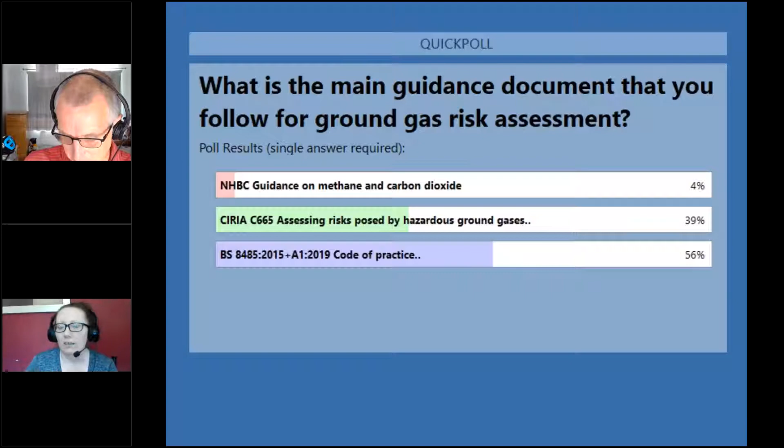So we've got 4% for the NHBC guidance, and then we've got 39% for the CIRIA, and 56% with the British Standard. So that's good. Right, excellent. No, that's good. So the reason for that question really is because what I want to do is explain one of the key differences between the CIRIA guidance and the British Standard, which I'll come to in a moment.

Can you see my screen, Alison?

Not yet, not yet. Right, okay. It says it's showing it. Hold on a minute, just double check. Right, wait a minute. Oh, that's you now. Yeah, you can see that.

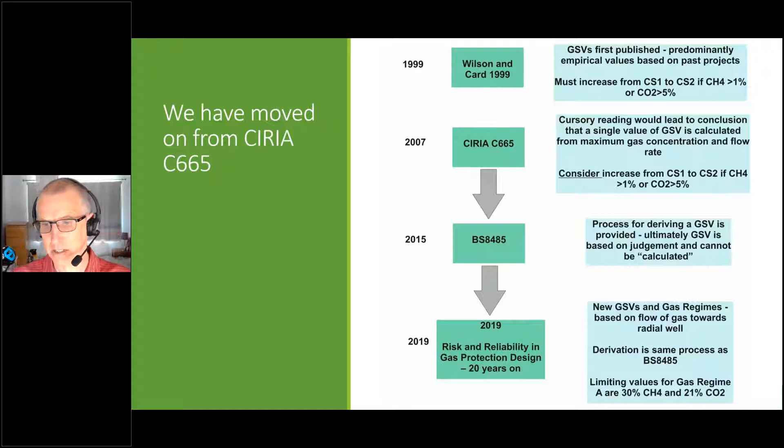And then one of the other key factors is that the limiting values for gas regime A, which is the regime when you don't need any gas protection, are 30% methane and 21% carbon dioxide. And I'll explain why that is the case in a few slides' time.

So whenever I do a presentation, everybody knows that I get on the old soapbox and talk about CSMs. Please, please, please, when you are doing gas risk assessments, whichever method you are using, do not take the maximum concentration and maximum flow rate and multiply them together to get a GSV without any thought of the CSM, or equally as important, without any check on data quality. So this is my colleagues and myself on a regular basis when we are asked to review gas risk assessment reports. And the number one is, why have they used data from flooded wells that is completely unrepresentative of what the CSM is telling you?

And equally, the other one we see an awful lot is people stick 20-metre deep ground monitoring wells into rock, into flooded sand layers in glacial till, all sorts of things, and then use the ridiculously high flow rates that they get from those wells to calculate a GSV. So please don't do that. And this is an extreme example. Well, unfortunately, it probably isn't an extreme example. We see equally bad practice on a regular basis.

So you can see here why somebody stuck a monitoring well in the top of a stockpile that was clearly going to be removed from site when it was developed is beyond me. Why they then monitored it and used the data to classify the whole site is also beyond me. But that is what has happened. They classified it as CS2 on the basis of that data, when all the other monitoring wells on that site that were actually in the glacial till, which covered the site that was going to be developed, were telling you it was CS1, and the conceptual model was telling you it was going to be CS1. An extreme example, and they were costing their client a lot of money on that job.

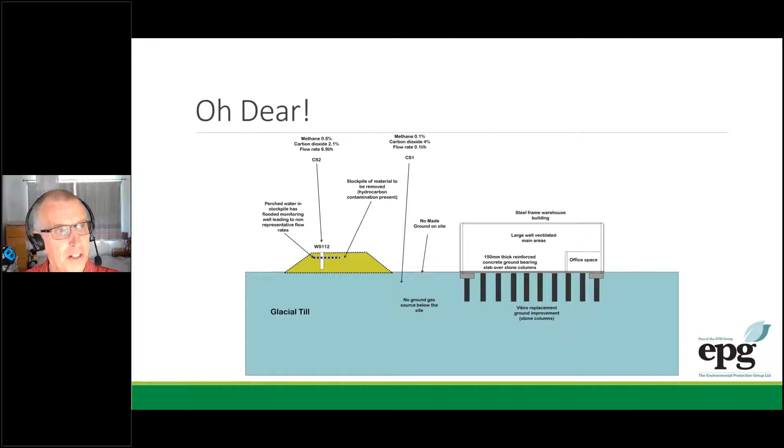But unfortunately, the people who can do that can also do things like this that is unsafe. They don't actually recognise when there is a real gas risk. So on this one, there's shallow coal workings underneath the site. The monitoring wells are in the shallow made ground, and that tells you that it's got a low flow rate. But there are indicators there, particularly the low oxygen concentration, that there might be an issue with mine gas emissions. Low oxygen concentration on its own is not a good indicator of risk, but when you look at the CSM, it does give you a warning sign.

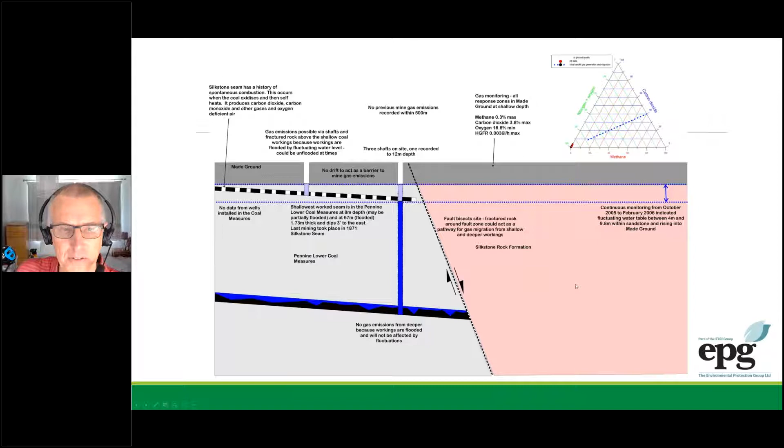And then when you look at the CSM, you can see that there are unflooded shallow mine workings. There's fluctuating groundwater over the depth where those workings are present. There are numerous shafts on site, and regardless of what the gas monitoring data in that shallow made ground says, you should be looking at what is happening in that deeper stratum, and whether the made ground is actually going to provide a buffer, for example. It needs a much more rigorous assessment. And to be honest, it's unlikely that you're going to classify that site as CS1 based on what you can see there. So these things about not looking at CSMs work both ways. The majority of times it does cost clients hundreds of thousands of pounds, but equally it can result in unsafe assessments as well.

So the process in BS 8485 is explained in clause 3.4 of BS 8485. The definition of a GSV is provided in 3.4. So it's the flow rate of hazardous gas representative of a site or zone derived from assessment of borehole concentrations and flow measurements, taking account of all other influencing factors in accordance with the CSM.

And it says there, note this definition is different from the definition of a GSV in CIRIA C665. And you can see there that's the statement about ultimately derived using professional judgment. So how do we go about doing that?

Well, the first thing to do is to collect the desk study information. That shouldn't just be commercial databases. You should actually be doing a wider search. The first thing we ever do is actually Google the site name and site address and various things like that to see if anything comes up from local history sites, for example, on the internet.

Then prepare a preliminary conceptual site model, and that should include site-specific cross-sections showing the ground profile and potential sources, migration pathways, etc. And then you do the preliminary risk assessment. And what you've got to do there, I'm forever using this word, credible and realistic sources of ground gas, because people come out with the weirdest and most wonderful statements about what can cause gas migration onto sites or sources of gas on sites. And I'll explain a few of those in a couple of slides' time.

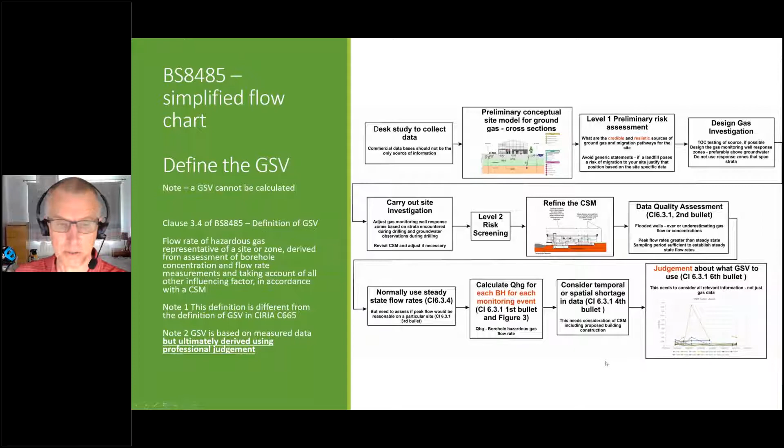There are then other considerations in BS 8485, so you need to read the whole of the thing, not just the tables. So you need to look at gas concentrations, as we've said, worst case assessment, and is it credible and reasonable. So there is the requirement to consider the increase. It's not mandatory. We read so many times people saying you've got to increase from CS1 to CS2 because there's 6% carbon dioxide. That is not correct. It says consider, and you've got to justify whether you do need to increase it.

And again, as I said, if you're on a site where all you've got is terrace gravels, there's no made ground or limited made ground, no real source, then just because you've got 7 or 8% carbon dioxide, even 16, 17% carbon dioxide, that happens because of natural processes in the ground. We understand that far better now. And you shouldn't really be increasing to CS2 on that basis.

Ternary plots are a good way of understanding what the source is. And there's a paper that we published. It is peer reviewed; anything we put in the public domain, we get peer reviewed by people in the industry. But it's not in an official journal. It's part of the update we're doing for the ground gas handbook. So that's on our website as a ground gas information sheet.

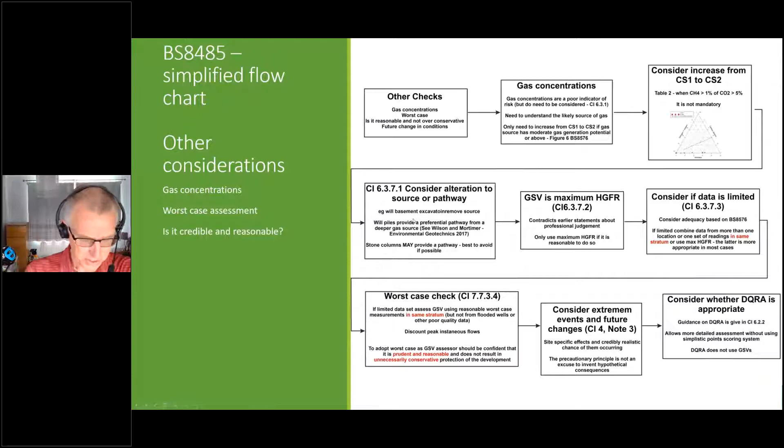But that is useful. You then consider alterations to the pathway or to the source as part of the construction. So, for example, is basement construction going to remove the source? Are piles going to form a preferential pathway from a deeper gas source up to the surface? If you're using stone columns, they're the one that we get really nervous about. They may provide a pathway. It is best to avoid them if you can. If you are going to put them in, then you need to do a rigorous assessment of whether they're going to increase the risk above what you're classifying the site as originally.

And other things, there's a job I've looked at recently where people were putting prefabricated vertical drains into alluvium to help with the consolidation. So basically they're just like an open conduit for gas to come up to the surface. So we had to do quite a rigorous analysis on that to see whether that's going to affect the gas risk or not.

Clause 6.3.7.2 does contradict virtually every other statement in BS 8485, where it says GSV is the maximum hazardous gas flow rate, but only use the maximum if it's reasonable to do so. And in clause 7.7.3.4, it says if there's a limited data set, assess the GSV using the reasonable worst case measurements, but in the same stratum. And also don't do it using data from flooded wells or other poor quality data. So discount peak instantaneous flows if they drop off and they're clearly caused by flooding.

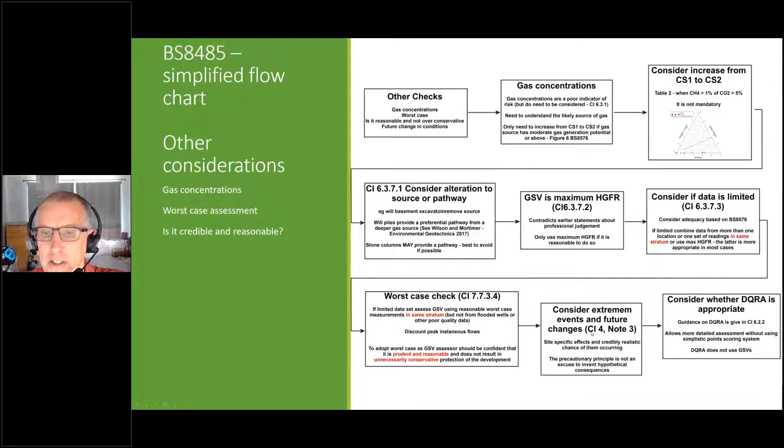And then finally, consider extreme events and future changes, which is clause 4, note 3. And there's a bit more guidance about looking at future changes in CIRIA report C795 on retrofitting, and also in the CL:AIRE guidance on mine gas risk assessment that is going to be published soon. It's not being published because I've not got my act together to do the final edits and organise everybody to have a meeting about it, but it will be around pretty soon.

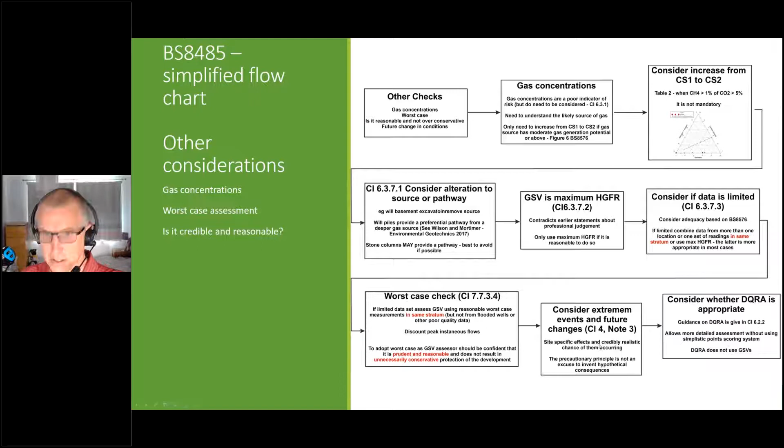And again there, don't invent hypothetical consequences. It's got to be realistic and credible. So the CSM should be a site-specific diagram, not generic, and the reason for that is explained here. This is a generic CSM that we were provided with. It's not based on the true cross-section of what is going to happen on that site. And it suggests that the whole building is going to be underlain by made ground that's producing gas.

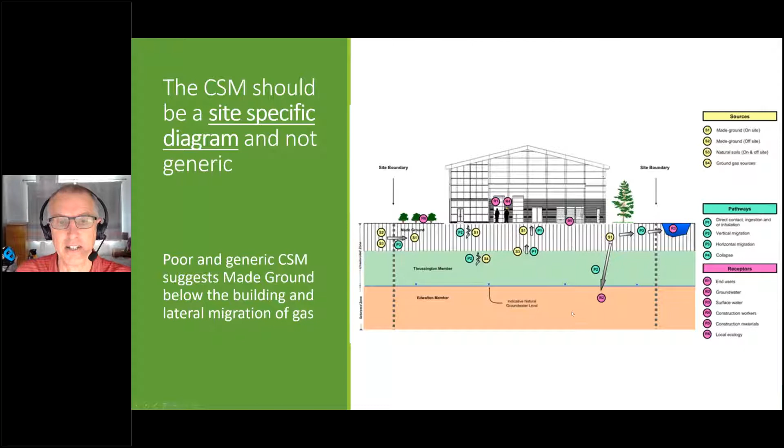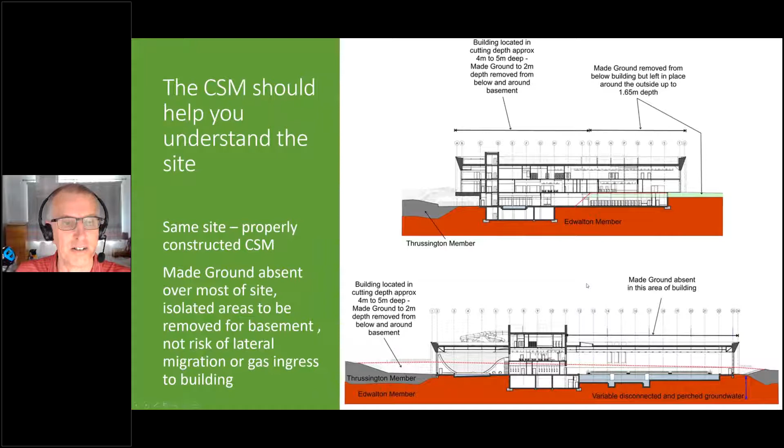If you actually look at what is really happening on that site, you can see there that first of all, made ground is only present in part of the site, and secondly, it's virtually all going to be removed by the construction of the building. So no risk at all of gas ingress into that building.

So top 5 errors: calculated GSV from maximum concentration and flow rate, regardless of CSM and response zones. No data quality because you're using peak flow rates from flooded wells. Increasing from CS1 to CS2 on the basis of elevated concentrations when there's no credible source and not taking account of the CSM. Not taking account of foundation construction and the effect on gas risk.

So what we've said in the coal mine guidance is actually the gas risk assessment shouldn't be signed off and finalised until the foundation design and floor slab construction is finalised. And at that point, you should do a review to make sure that the final construction proposals won't influence the gas risk. And really, although it's in that mining report, it actually applies to all ground gas risk assessment. And then the fifth thing that causes issues is response zones in monitoring wells that span strata. So it makes it difficult to interpret the data.

And then coming back to credible sources, things that we've read: a pond was present 50 metres away, infilled in the 1920s. Most small ponds are not particularly deep. The kind of things that you used to see on maps in fields at field boundaries, those natural ponds aren't deep. And if it was filled in in the 20s, it's nigh on impossible for lateral migration to occur out of those features.

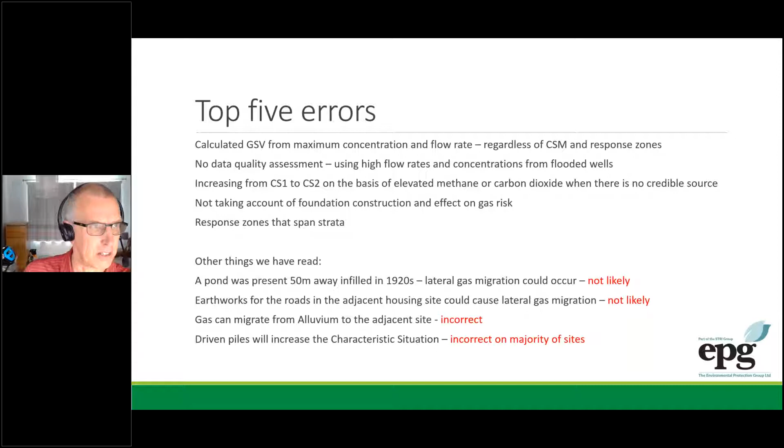And driven piles will increase the characteristic situation. Again, on the majority of sites, that's not true. Piles of any description can cause preferential pathways, but in very, very specific circumstances. Really, it's where you've got either open tube piles that aren't infilled, or a gas source that is pressurized with a very thin confining layer over the top of it. But all that is explained in a paper that Sarah and I wrote a couple of years ago in Environmental Geotechnics.

So don't mix data from different response zones. This is just a diagrammatic explanation of that. And to be fair, on this site, the consultant did a good job with this one. They recognised that the flow rates they were getting out of these deeper wells, whether flooded or unflooded, were actually not representative of the ground gas risk at the surface. It's just because it had gone into fractured rock.

And when the assessment was done using the flow rates and carbon dioxide concentrations just in the made ground, that lowered the classification of the site significantly, as you'd expect, because you can see there's 82.1 litres per hour. Even the steady state values, assuming they were steady state, were about 33 litres per hour.

But there wasn't any; the made ground was a slight source, but nothing that could support those sorts of gas emission rates in the long term. But yeah, the assessment was based on a thorough understanding of the CSM on that site.

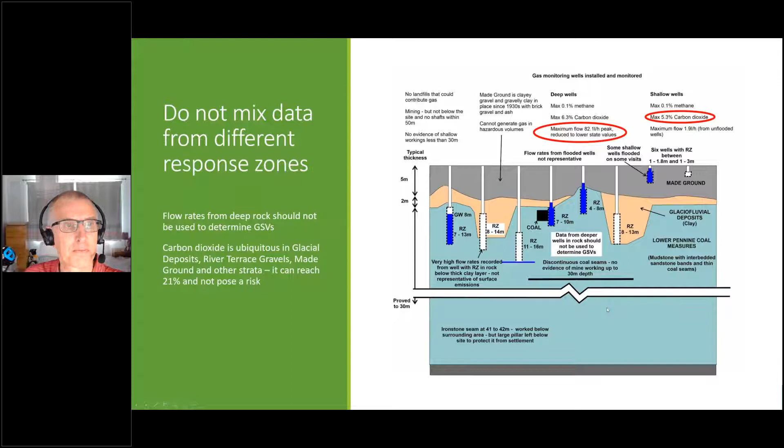So the Ground Engineering paper, where does it fit? In actual fact, some parts of the paper can be used with spot monitoring and the current GSVs, because there's a lot of background information in there about gas in alluvium, natural sources of carbon dioxide, presence of gas in engineered fill, and research that's been done in America.

But to use the new screening values, you do have to have continuous monitoring. So there's a trade-off. If you want to be less conservative in the assessment, you need better quality data. So one of the requirements for those screening levels is using continuous monitoring data. And I was thinking about this when I was doing this presentation: where do they sit in the current approach?

The current gas screening values, if you apply them properly, do work, but they are empirical. These are still screening values that we've published, but as we said, they're based on an analytical approach. So they probably sit somewhere between the empirical approach and DQRA, detailed quantitative risk assessment. But that's just me trying to think where you would sit them in that process.

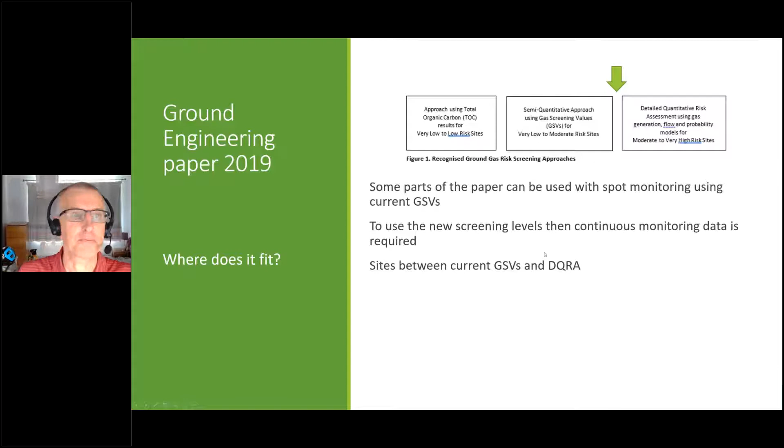So methane in alluvium. We are forever doing literature searches to check for gas emission incidents. And over the past 15, 20 years, I've never seen any instance of methane migration into surface buildings from alluvium. And there are reasons why that is the case.

For one thing, geological peat and organic material in alluvium does not generate gas at sufficient rates to cause hazardous gas emissions. If there are emissions, they will be at extremely low rates that are almost imperceptible. That's because the organic material that is left is non-labile; it's not degradable. And also, peat and alluvium are typically saturated in geological deposits, which limits diffusion rates and limits free gas volume as well.

Now, you can get small pockets of trapped gas in alluvium. Some people think they've got large pockets, but in the scheme of things, they're small. The reason they're trapped is because it's low permeability, and that shows that it's trapped, it's not moving. You might puncture it with a pile and get a short-term emission, but it's not going to pose a significant hazard to buildings above. And you also get surface tension forces which limit movement as well.

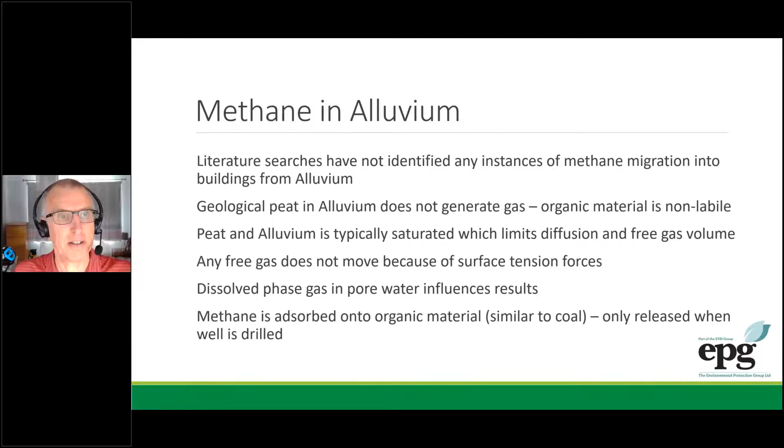Research in America has found that in made ground, uncontrolled and engineered fill materials, you can find methane greater than 1%, especially if you've got wet zones and an anaerobic zone. That can occur locally as well; you don't have to have a continuous groundwater table. You can have localized perched water tables and anaerobic hotspots that are producing methane, but not at volumes that pose a risk. So again, concentrations are not a good indicator of risk in these situations.

They also found that the probability of detecting methane increases with the depth of well, which is probably pretty obvious to most people. But where you've got deep fill projects, you have to think: are you going to put wells in to great depth, or just put shallow wells in at 4 or 5 meters to see what's happening at the top, because that's what you're interested in in terms of emissions. If you put really deep wells in, you increase the risk of finding elevated concentrations that aren't really representative of the risk to the development.

An extensive study on a project in America found that high concentrations of methane, up to 30%, are normal in engineered fills, particularly those containing silts and clays. They've proposed 30% methane as a rule of thumb to identify when gas production may pose a risk of significant emissions. And that's what we've adopted in the paper.

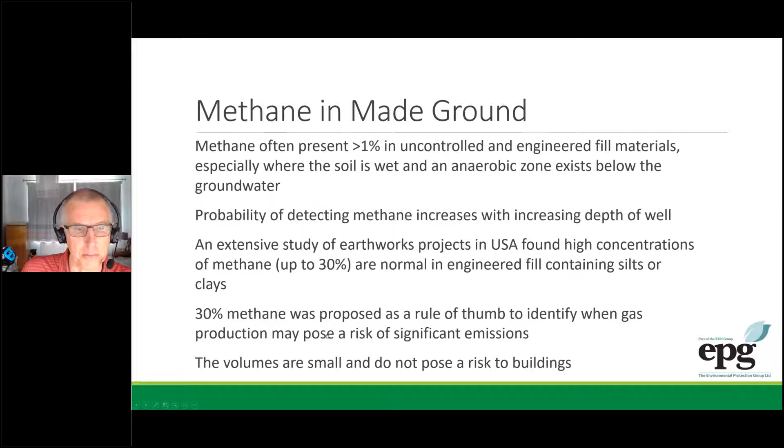Carbon dioxide's everywhere in the subsoil environment. As I've said, in coal measures, river terrace gravels, in inert made ground, you find elevated carbon dioxide, and it's being produced not by methanogenic degradation that you get in landfills. It's biological respiration, which is a different process, and it occurs extremely slowly, so it can't produce high flows of gas from the ground.

You have to be careful with colliery spoil. If you're building above colliery spoil and you're pretty confident there's not going to be any changes to groundwater chemistry, it's low risk, and it's not going to cause hazardous emissions. You do have to be careful if you're putting basements into it, and also if you're grouting up mine workings, and quite often the colliery spoil is in backfilled open cast pits, and you've got mine workings leading into it. And if you upset the groundwater chemistry and you get acidic groundwater coming into the colliery spoil, it can produce large volumes of carbon dioxide and pose an issue.

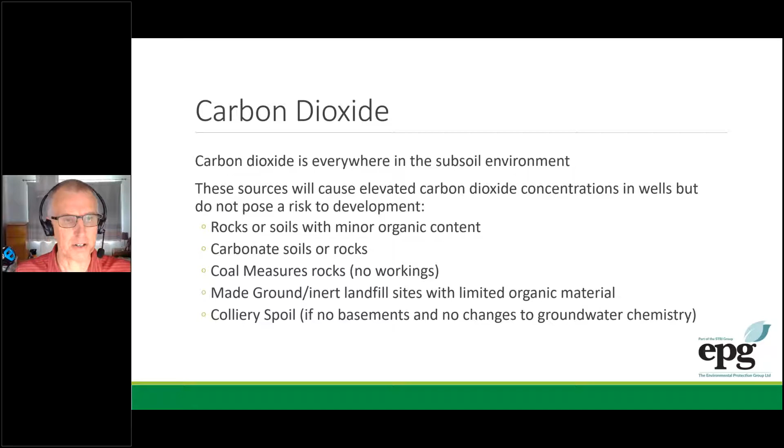So on to the approach for the final part of this presentation. So this is the CSM for the new approach. And again, if we're going to go to a more analytical approach, then you need to check that the assumptions made in deriving these screening values fit your site. And that is the same as you would do if you were doing a risk assessment and using the GACs, the S4ULs and all the other ones that are around, or the groundwater values that SoBRA have published. You should be looking at the derivation of those values to make sure that what you're doing on your site fits the model that they've used to derive those values, and that's the same for these ground gas values.

So we've effectively looked at radial flow towards a borehole, and we've looked at what the limiting flow rate from the well would need to be to limit gas migration into the building to an acceptable level. So it's a standard analysis. It's just using Fick's law and Darcy's law, and radial flow to a well, and it's relatively straightforward. Now, what you do need, you need a flow boundary. So you need a fully penetrating well to a flow boundary.

In groundwater analysis, that would have to be an impermeable boundary such as clay, but for gas, groundwater will provide an impermeable flow boundary. And we're assuming that the gas source is at 1 metre depth, which, to be honest, we've yet to see a site where that is not the case, mainly because you will get oxygenation of the soil airspace up to 1 metre on most sites. And even if you put a building on top of it, if it's housing, for example, that's not going to cap it off enough that you don't get that same oxygenation under the centre of the building. You do have to be a bit careful with warehouses and larger span buildings, because that might not be the case.

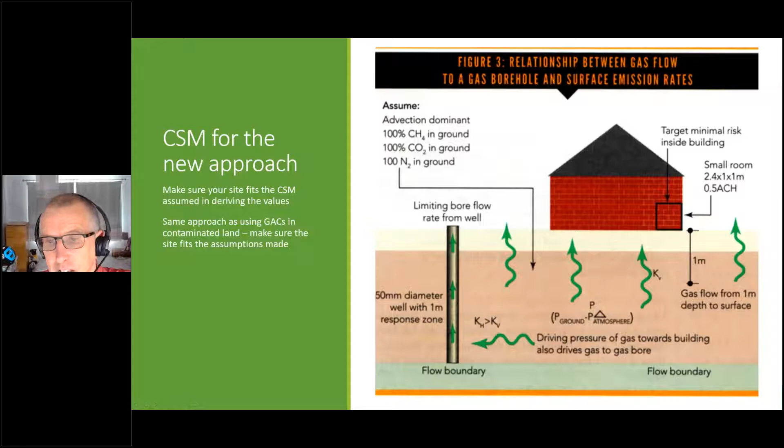It's also got important limitations, and to be honest, these probably should be applied to BS 8485 as well. So it's not to be applied where the gas source is an actively gassing landfill site, but be realistic about this. So, for example, a 1960s landfill, it would be suitable to use it for, but not for the more recent domestic sites. Don't use it where gas could be migrating from open mine workings via shafts or fractured rock. So you need to check the CSM to make sure that you can use it. So you can use it where you've got coal measures. And if you've got unworked coal seams, that's not a problem. But where you've got these potentially high-risk sources of open mine workings and shafts, you shouldn't use it.

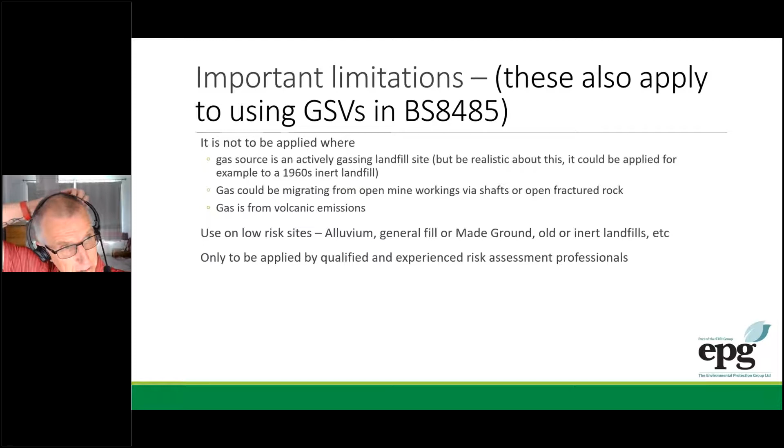And where gas is from volcanic emissions, but I doubt that many people will be worrying about that. But there are countries where we have done work where we've got volcanic emissions. I suppose the other thing that I would say is don't use it where you've got leaking oil and gas wells, which is potentially going to be an issue, where you've got fracking sites and things like that. It's certainly an issue in California, for example, where they've got lots of leaking oil wells that cause gas emissions that have caused explosions in buildings.

So it's for all these sites that we're normally dealing with, alluvium, general fill, made ground, and old or inert landfill sites. And there's also a requirement that it's only to be applied by qualified and experienced risk assessment professionals. So think about that when you're starting to use it.

So if we are modelling, we need to limit the gas hazard values indoors. So essentially what we've done is for gas regime A, which is where there's no gas protection required, we're assuming that there's no floor slab or any form of floor construction. Effectively, we're assuming you've got an open earth floor. And for that, we've used 100 ppm for methane, 0.04%, which is 400 ppm for carbon dioxide, and 20.5% for oxygen.

Now, the carbon dioxide, actually, we could have used 1,000 ppm, but we erred on the side of caution for that one. But those values and the background to them are explained in CIRIA report C795, which is retrofitting gas protection measures again. Then as we go up the gas regime, we've increased the allowable concentrations inside the building, but that is because you're going to end up putting gas protection in the buildings.

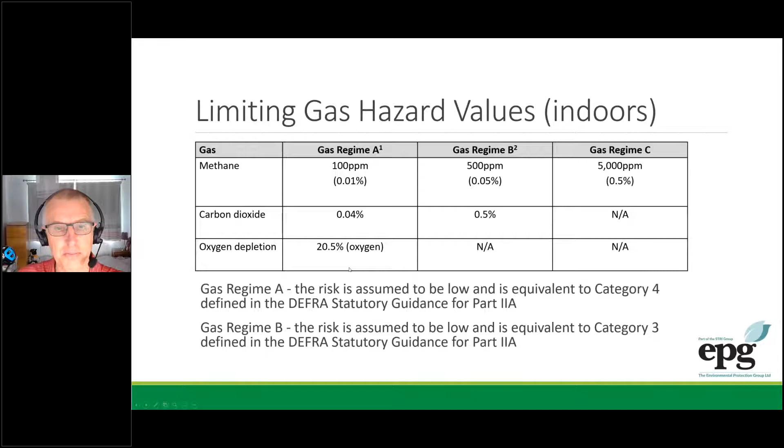We've also narrowed it down, because what we found in practice is that there's not a lot of difference between some of the gas regimes. So for example, once you get up to 5 or 6, in practical terms, there's probably no difference between those two. And to be honest, for housing, there's no real practical difference between CS2 and CS3, certainly from what we find.

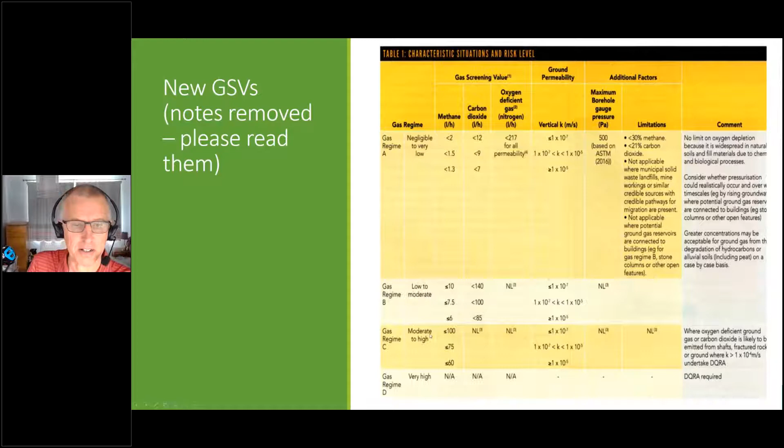And then we've also tried to simplify the protection required as well. So we've moved away from the scoring system, because what we're seeing is lots of people who don't really understand gas risk in particular just thinking that gas design is adding up a few points. So we've moved away from that, and the scoring system is just based on levels of protection. So levels of redundancy is a better description. And we've narrowed down the types of development as well, because I think people focus on the wrong things when they're looking at type A and type B, for example. So we've simplified that down.

And you can see really, for gas regime A, none is required for residential development. Gas regime B, you need 2 levels of protection. Same for C. And then anything above that, you go to a site-specific assessment. And really, the levels of protection are the same, but the design of those is going to change between the 2 gas regimes. And really, that's going to revolve around the robustness of the floor slab construction and the design of any underfloor venting that you put into the system. But we're shifting away from just adding up points to actually doing more analytical design, as is required for this approach.

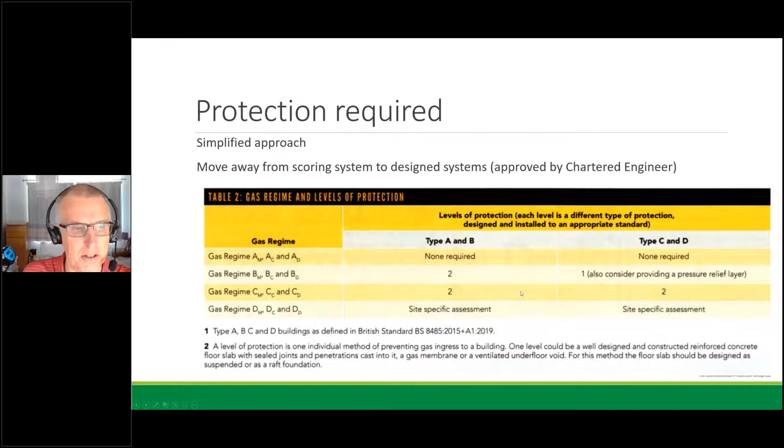And then that's just a comparison to finish off with the existing BS8485 system on the left, and you can see for the methane and the carbon dioxide. So we are moving the numbers upwards without a doubt, but certainly from the work that we've done in the past 10, 15 years, this is still conservative. It's still precautionary. It's still on the right side of the fence, but these numbers are far better in terms of not putting in unnecessary gas protection measures when we don't need to.

And you can see for carbon dioxide, the numbers are, well, I said they're significantly higher. Yeah, 7 litres per hour, to be honest, in reality, is still extremely low when you compare that to the kind of flow rates that you get out of the high-risk sources that we know cause problems. So for example, mine shafts, you can easily get 3,000 or 4,000 litres per hour coming out of mine shafts. You can easily get 10,000 litres per hour coming out of landfill sites. So we're still at very, very low rates, even with these numbers.

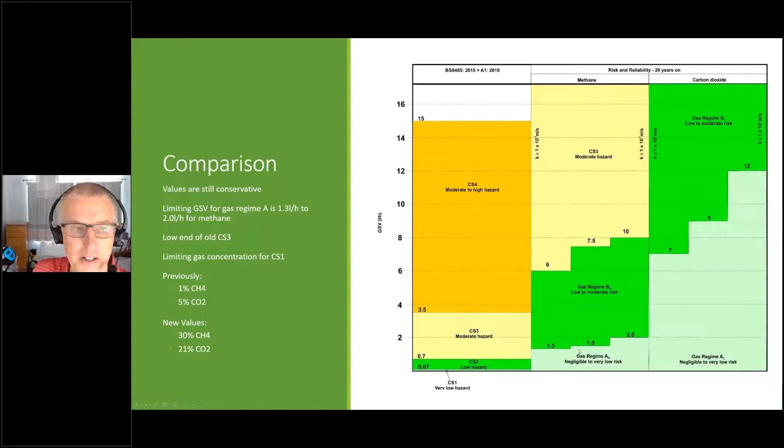And then just finally, an example where we've used it on a site. So we've put response zones in the unsaturated zone. The flow boundary is the groundwater. On this site, there's a clean layer of fill that's roughly about 1 metre deep, and then the main material that's causing elevated gas is below that. We've got fully penetrating wells. We've got gas monitoring using continuous monitoring data, covers sufficient pressure drops in CL:AIRE TB16.

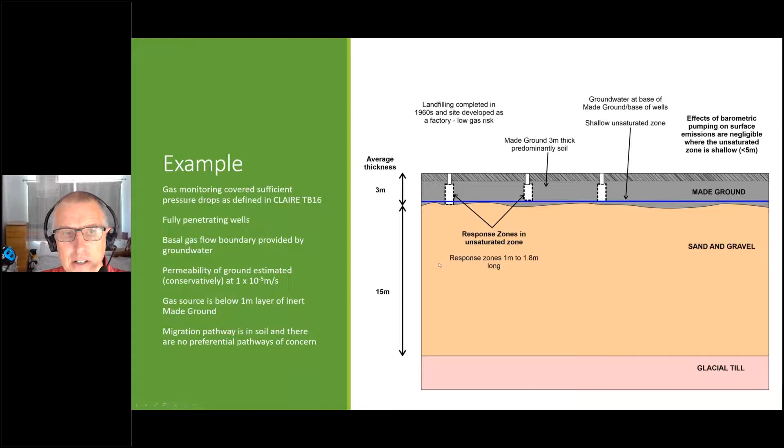We know what the permeability of ground is because that's been estimated. I'm not sure whether we measured it on this one, but we'd got good descriptions of the soil, and we've made a conservative assessment. And the migration pathways are in soil, not in rock, and there are no preferential pathways that are going to be a concern. So it meets all the requirements. And then you can see here, the bottom graph, the hazardous gas flow rates from the continuous monitoring are all actually well below the limiting value for gas regime A.

And this is really why this one was a good test, because what we want to know is if we're getting these low flow rates and we think it needs gas protection, are these other fail-safes kicking in to kick us up into gas regime B? And on this site they are. So you can see here we had peaks of gas concentration above 30% in that one well, but then another well we had peaks going up to 60%, and we were regularly getting close to or slightly exceeding 30%. And that ties in with a conceptual model of the material that was producing the gas, which is fairly old waste. It's not the kind of site where you wouldn't put gas protection measures in, but there's not an excessive risk.

And then the same applied with the borehole pressures as well. So another limiting factor is the pressure's got to be less than 500 pascals. So again, the maximum borehole pressure was frequently either coming up towards 500 or exceeding it. So that then pushes us into gas regime B, and 2 levels of protection were required, which on this site is a gas membrane and venting, which is what we would have arrived at using BS 8485 in actual fact. So the fail-safes are there to make sure that we do put gas protection measures in where it is required.

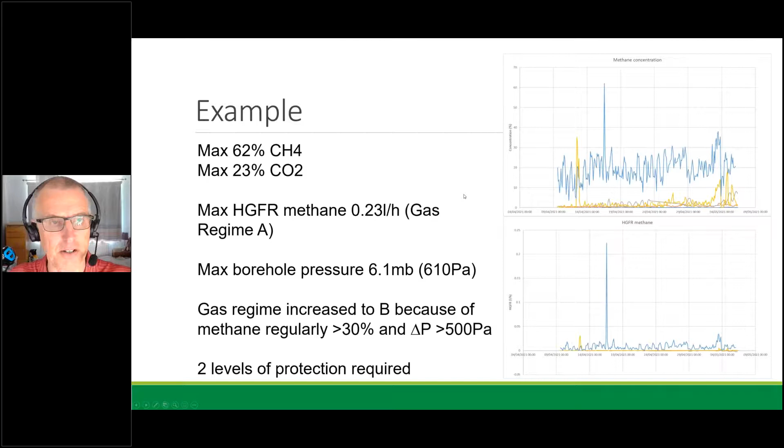And then finally, just use it as part of a multiple lines of evidence approach, and that's explained in CIRIA C795 there. So you do need to actually go through each line of evidence, look at it, assess it, and then you say, right, this line of evidence is saying this site is low risk, or it's saying it's higher risk. And you do that for each line of evidence, and then at the bottom of that, you say, right, overall, everything is saying low risk, everything's fine, or everything's saying high risk, or we've got this one bit of evidence that doesn't fit in with everything else, so therefore we think it's whatever risk. So you've got to make that judgment. In a multiple lines of evidence approach, you don't just rely on the gas monitoring data.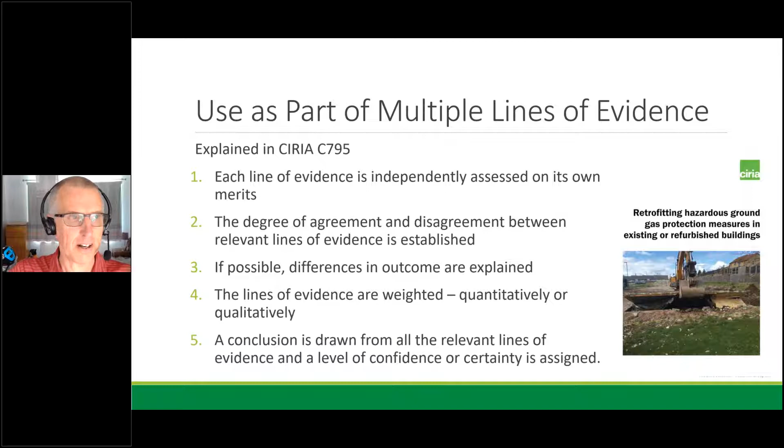And that's just some of these ground gas information sheets that we're producing as we work on updating the ground gas handbook. So thank you, and hopefully we have got time for a few questions.

That's great, Steve. Thank you very much. Yeah, we do have some questions coming in. Can you hear me, Steve? Yeah. Yeah. That's nice. Sorry. Yeah, so maybe just invite Stephen to come on as well, and we can do sort of like a question round for you.

So Patrick Flood was in very, very quick, like at 12 o'clock. He had a very early question in. He's asked CS2/Amber 1 site classification: why does industry still do this? I sense some frustration in there. To be fair, he did pre-warn me about this question because he rang me up earlier and said, do you mind if I ask this question? Yeah, we do see it all the time.

And hopefully what you can see from that, I didn't mention the NHBC guidance in that first slide, but I suppose the NHBC guidance was an attempt to move towards a more analytical approach, because it does look at gas emissions into the building and the dilution. I think one of the problems with it not being more widely taken up is that because they've relied on the building construction to inform the actual derivation of the screening values, it makes it quite specific, and that's what we've tried to avoid with this approach.